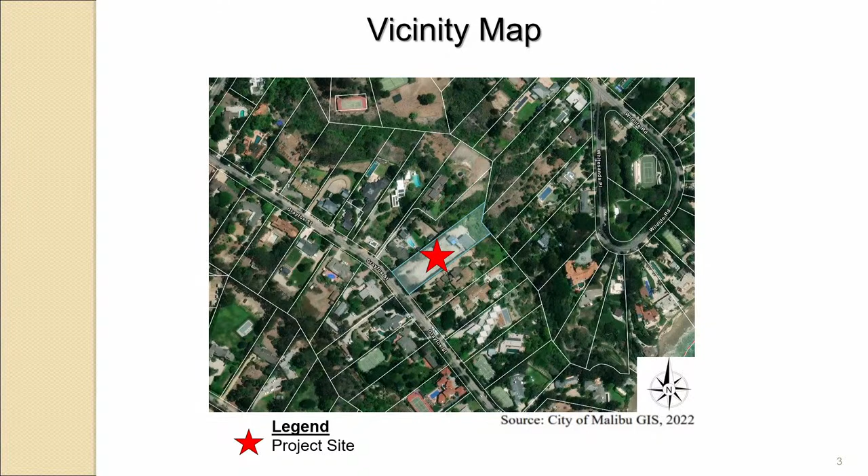The project proposes the following: an interior-exterior remodel of the existing residence, with 46.5% of exterior walls proposed to be demolished; a 431 square foot addition to the single-family residence; and a change from a pitch roof to a flat roof.

A detached 900 square foot second unit, a detached 943 square foot garage, a new swimming pool and spa, permeable pool decking, landscape, hardscape, a new on-site wastewater treatment system, a 570 square foot open air parking trellis, a 220 square foot open air patio trellis, and a new front yard fence with 42-inch solid up to 6-foot visually permeable sections, and some vehicular gates.

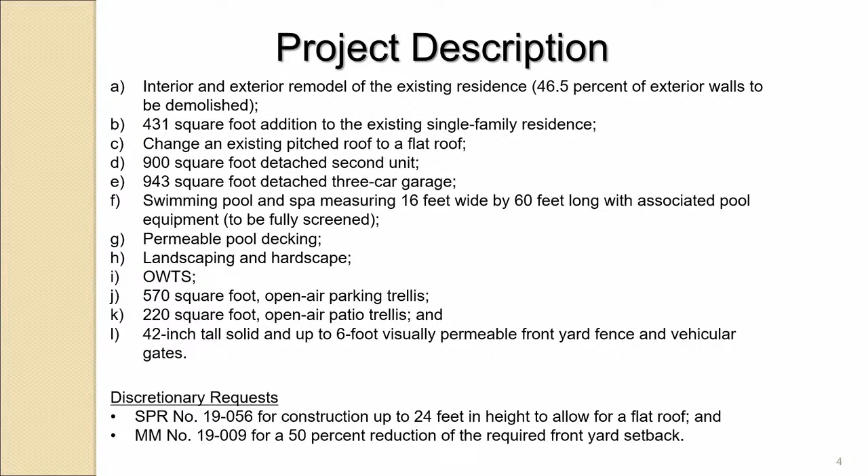The project includes a site plan review for construction over 18 feet up to 24 feet with a flat roof, and a minor modification for up to a 50% reduction of the front yard setback.

So here you see a site plan showing all of the proposed development. The pool is sited in between the new detached garage and second unit. The existing attached garage will become habitable area, part of the existing single-family residence.

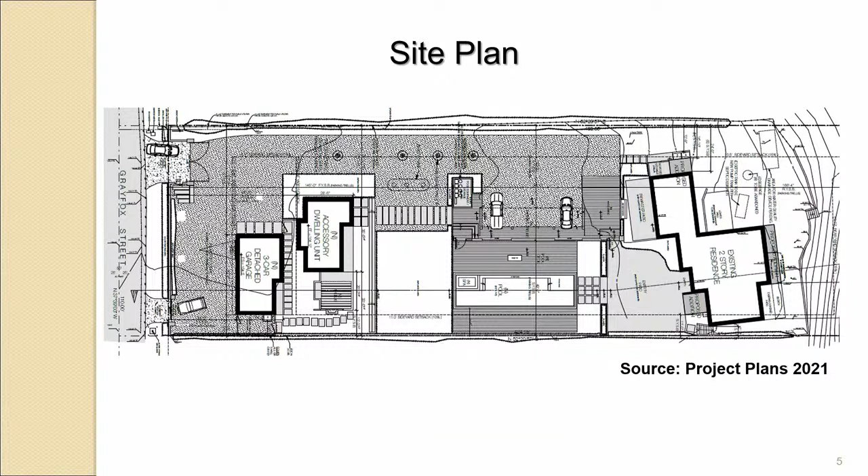The proposed development is to be all on slopes flatter than 4-to-1, as required by Chapter 4 of the LIP regarding ESHA in the Point Dume neighborhood. The project is proposing to reduce the front yard setback by 50%, and staff was able to make all the required findings. Multiple properties along Gray Fox have similar structures sited in the same relative areas on their respective lots.

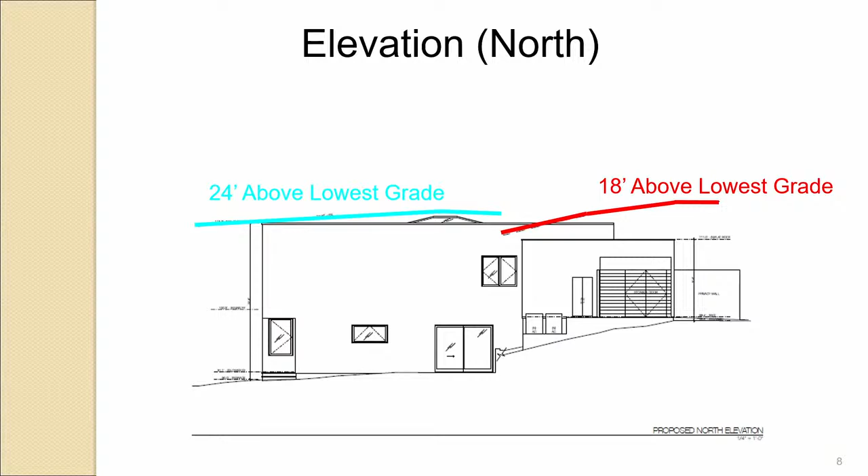The site will be compliant with the 2/3 rule, or LIP section 3.6K2. Areas above 18 feet will only account for 60% of the areas below 18 feet.

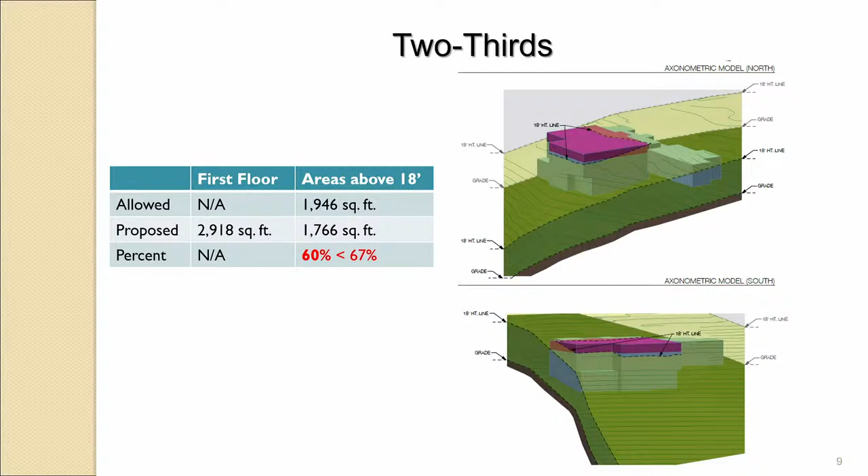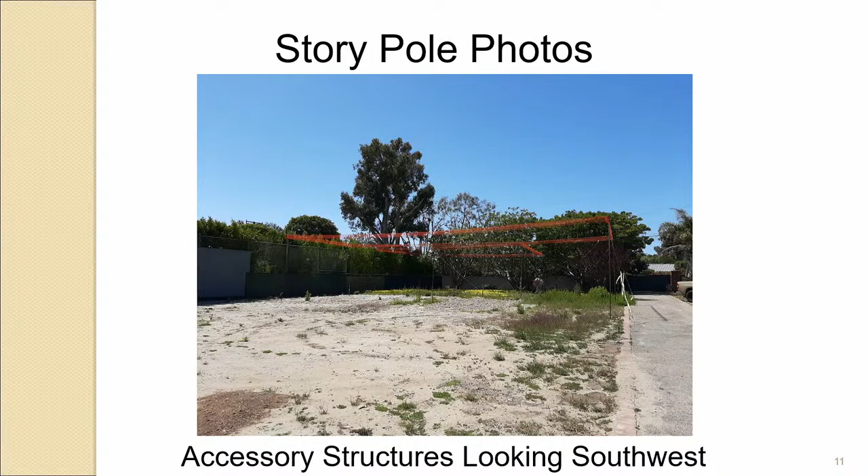Story poles were established in April of this year, and this is going to be a series of story pole photos. These are of the accessory structures looking southwest. This is of the single-family residence looking east of the front there.

That's the end of my presentation. Staff recommends adopting Planning Commission Resolution 2239, approving the project as conditioned.

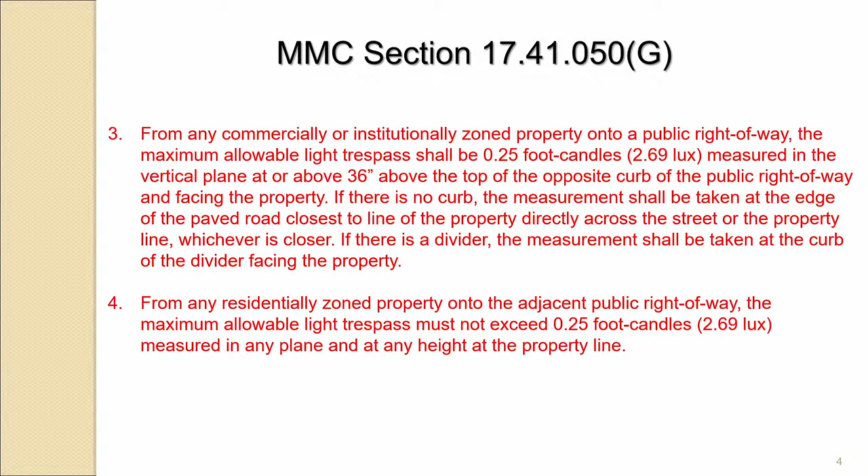So with that, staff recommends that the Planning Commission adopt Resolution 2239, recommending that the City Council approve the ZTA 22-001 to update the Dark Sky Ordinance light trespass requirements for commercial and institutional zones.

I'd like to add that the whole impetus to this was the gas stations. Tyler was reviewing the 5 remaining service stations, and they had all applied for a deviation request. We had scheduled that for a public hearing before the Planning Commission, because in the Dark Skies Ordinance, if you can't meet the ordinance, the appropriate mechanism is what's considered a deviation, which in this case goes before the Planning Commission. So those deviations were prepared.

Were the reports distributed, or just the notice? Just the notices went out, and there was concern raised by members of the public as well as some council members.

Essentially, we stopped moving forward on those so that a consultant could be retained. We ended up retaining Jim Benya, who had worked with the city to prepare the ordinance. The reason for bringing Jim back on was to have him look at those 5 gas stations and offer a professional, expert opinion on whether or not those gas stations required the deviation. In his opinion, he modeled the gas stations many different ways and found that, given the canopy's relationship to the public right-of-way, there was not really a practical way, short of lowering the canopies, which then wouldn't work because of vehicle clearance, to address this bit of light trespass.